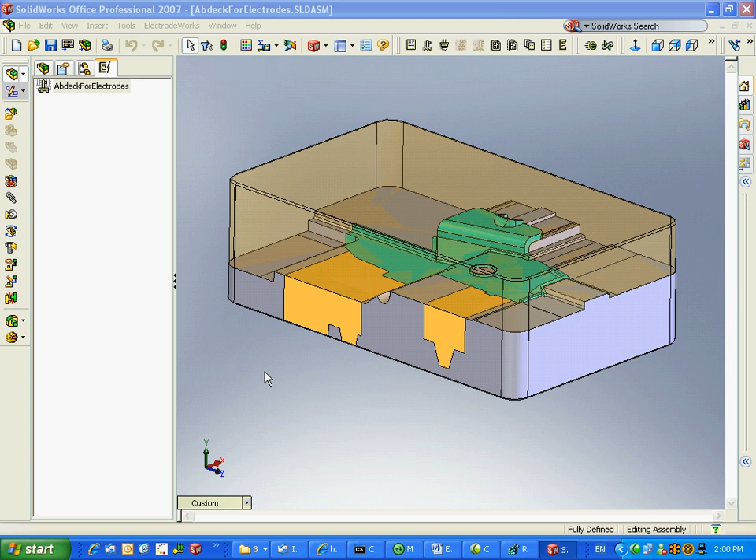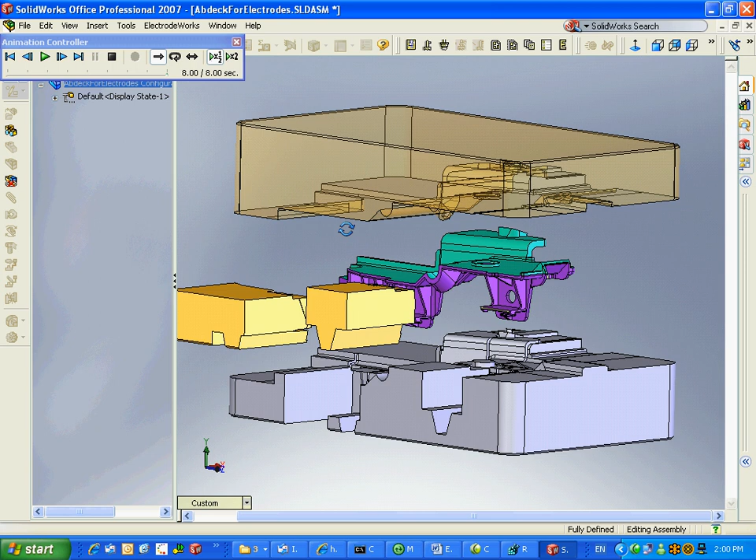This is the insert stack of Abdeck, a part from the car industry. We have split this part using SplitWorks. ElectrodeWorks runs in assembly mode and has its own feature manager tree from which all ElectrodeWorks menus can be activated, as well as from the traditional menu and icon system.

The first step when adding an electrode is to retrieve a holder from the standard or user-created library. Next, we identify the part and the electrode direction. Now we select the burn faces and automatically calculate the electrode according to the bounding box around the faces.

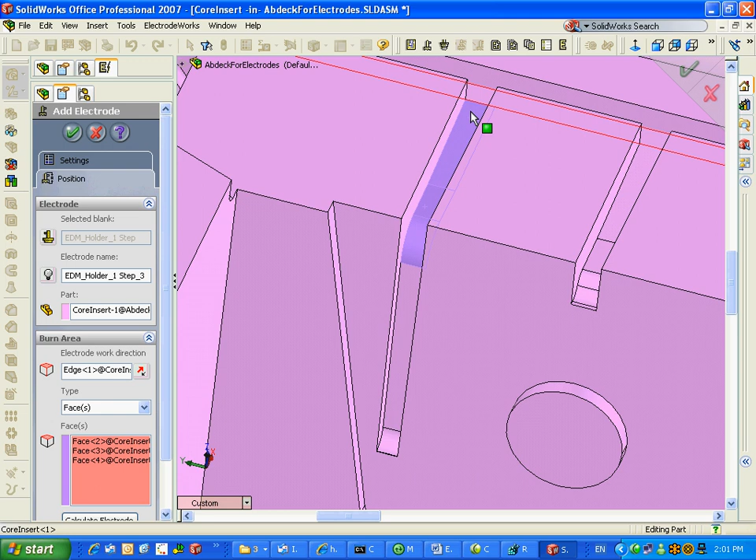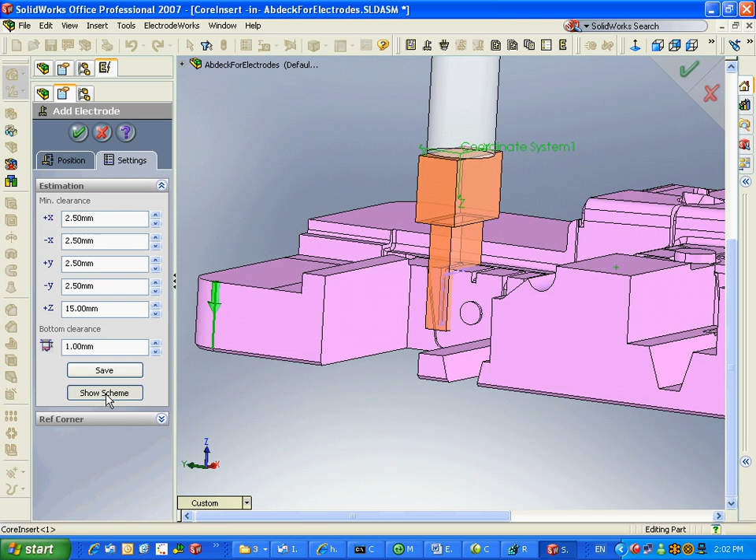Under the settings menu, we can see the modifiable parameters of the bounding box, and an option to add fillets or chamfers to the electrode itself.

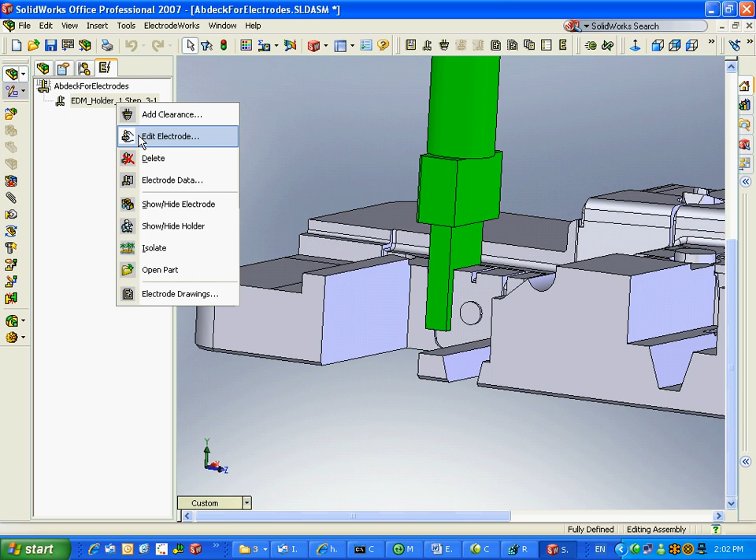After validation, the electrode is created and appears in the ElectrodeWorks feature manager tree. Isolate, copied from standard SolidWorks, is a useful tool in this context.

Now we are going to add clearances to the electrode. We choose a direction and the faces to clear.

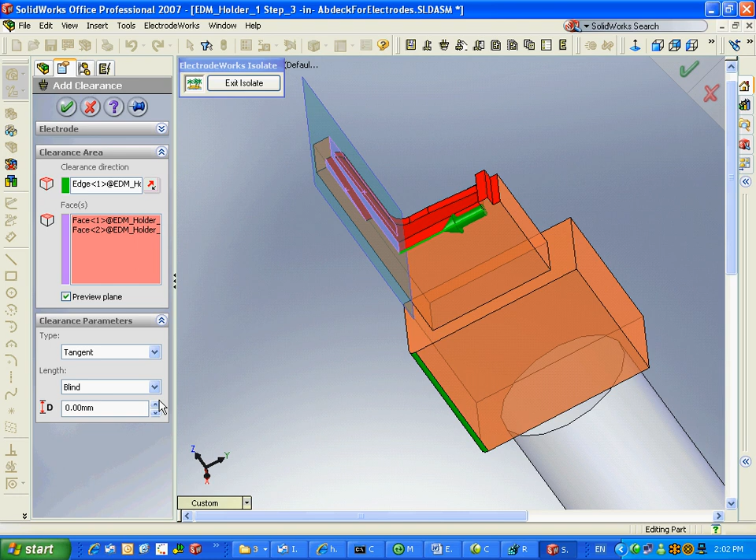In this case, we select the through option to delete all these faces. Next, we delete the faces on the opposite side.

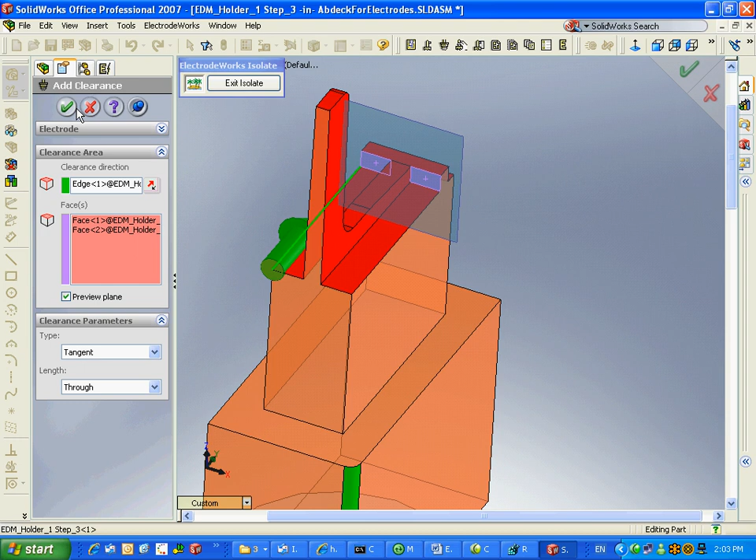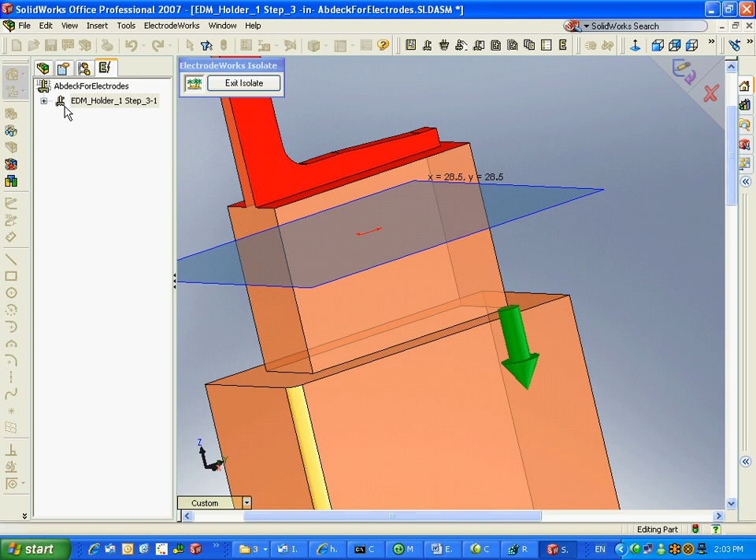And finally, we make a clearance for the non-burn faces of the core. This clearance is created 5 millimeters distance. Exiting the isolate, we see the result, including the clearances.

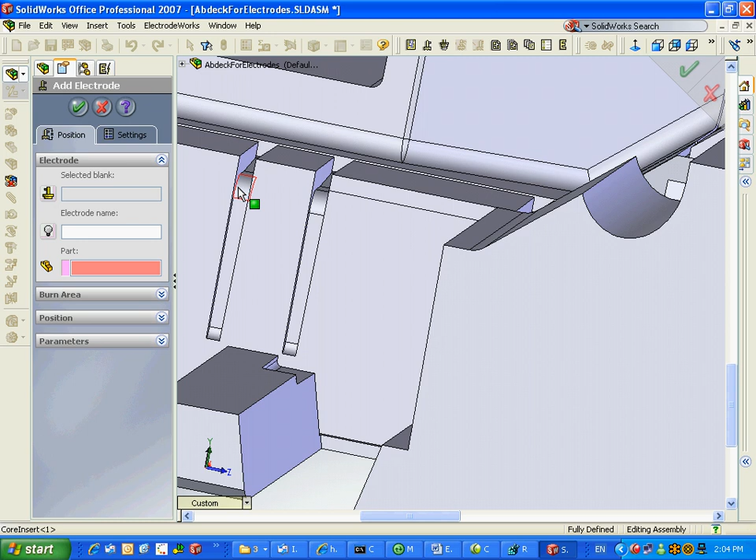Next, we create an electrode for 2 ribs together in the same manner. Again, we select an electrode holder.

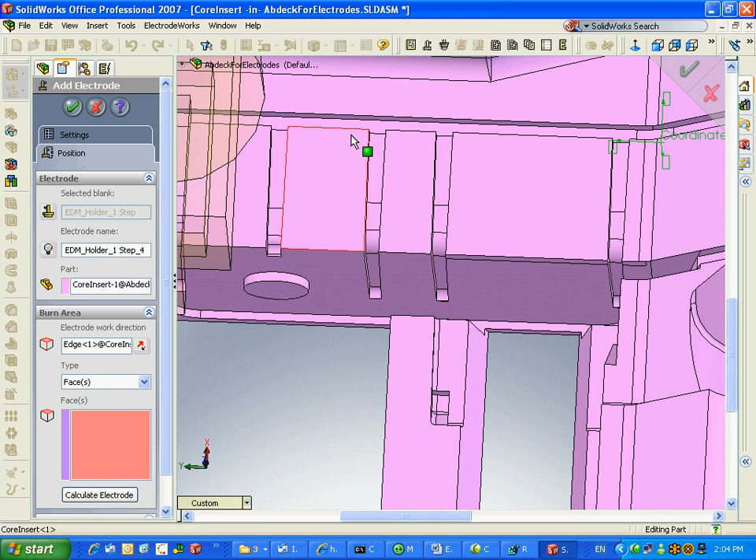This time, we box select the faces that we are interested in burning, and deselect the face we don't need.

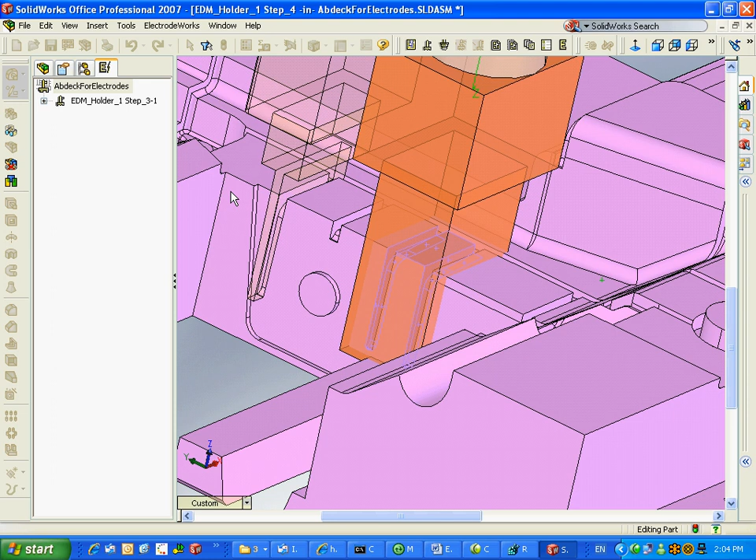Again, we clear the faces on both sides of the electrode.

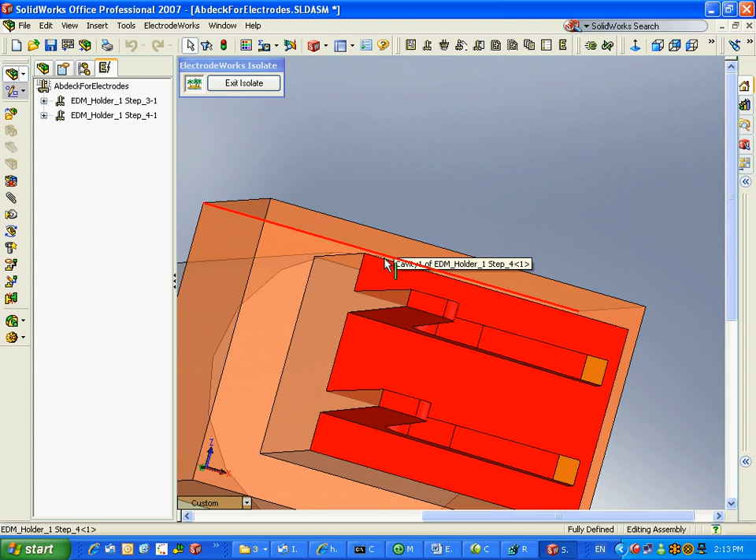Oh, there's a problem. We want to clear the bottom faces separately, but we have created the electrode a little bit too big. So let's edit it.

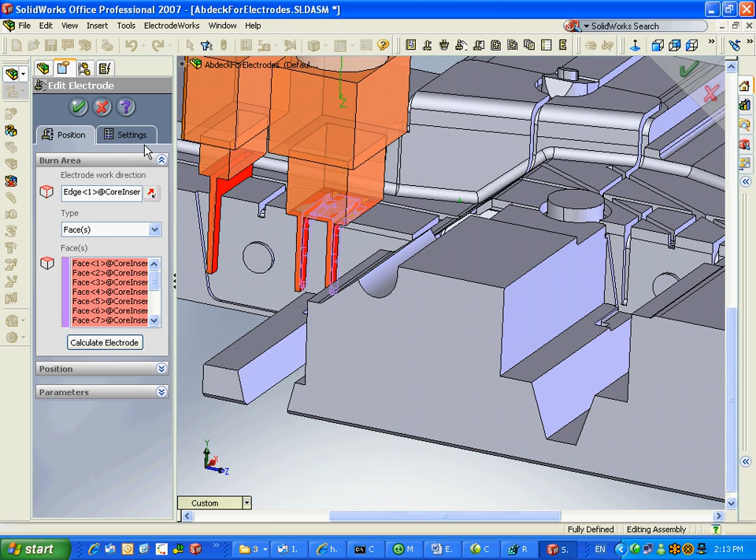Here we change the parameters of the electrode, and ElectrodeWorks dynamically updates the preview.

Well, that's not what we want. We want to clear the ridge. So we'll change the other B2 or B1 parameter.

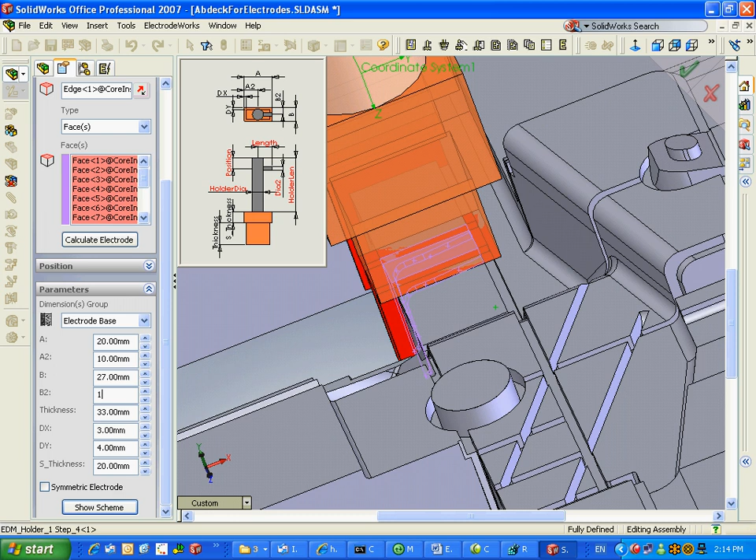Okay, that looks right. On validating, the electrode is modified, including the already created clearances.

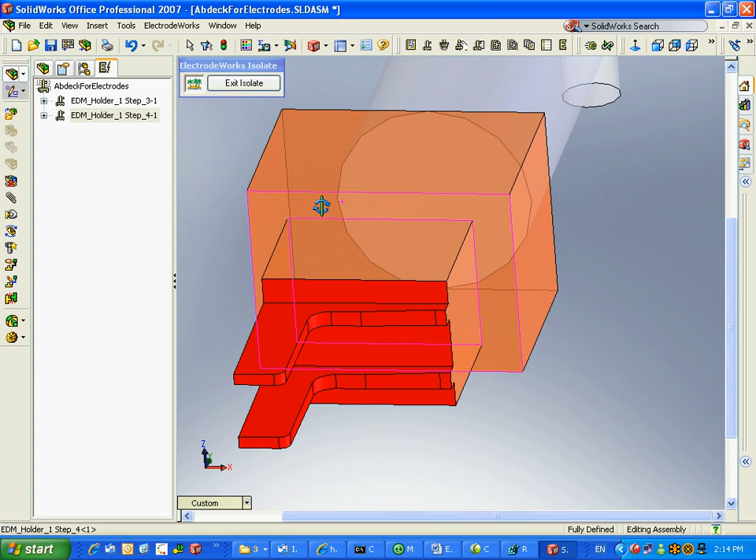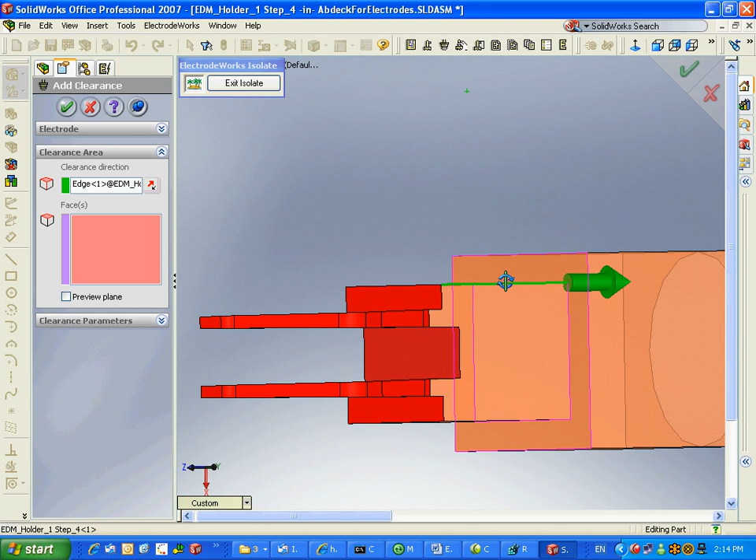Now we can clear the bottom faces separately. Here we use the blind option for the middle face, 2 millimeters, and the side face of 5.

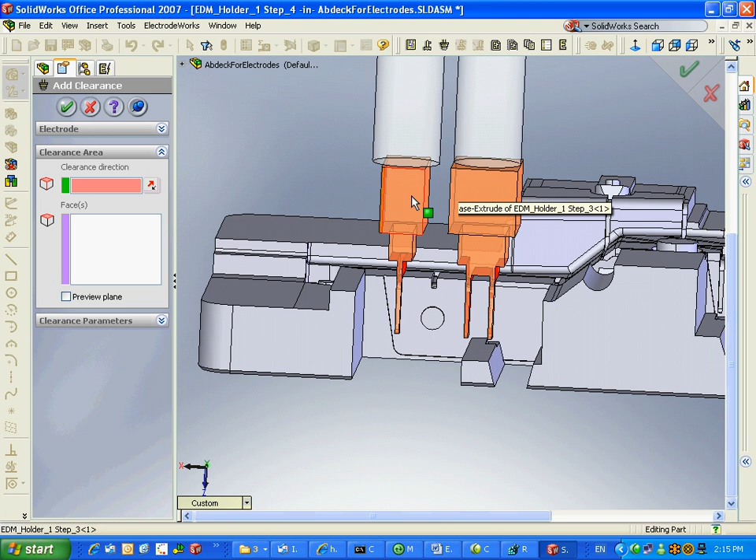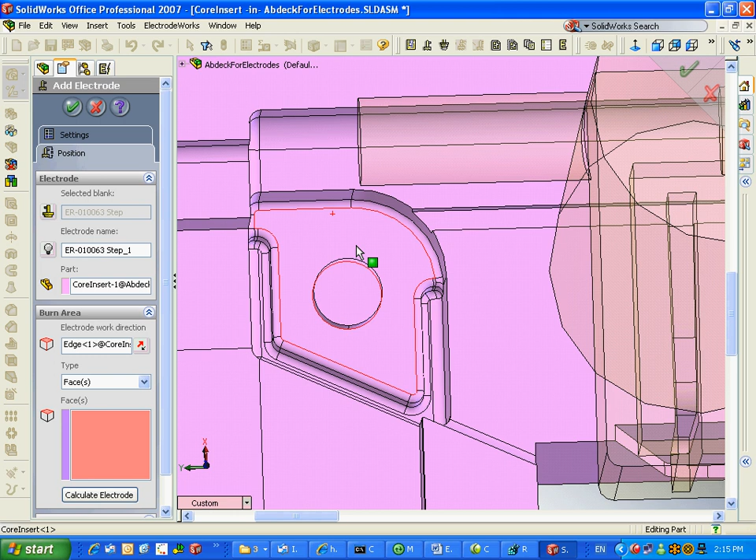Let's create one more electrode. This time from the Erowa library. Again, we box select the faces and click on the Create Electrode.

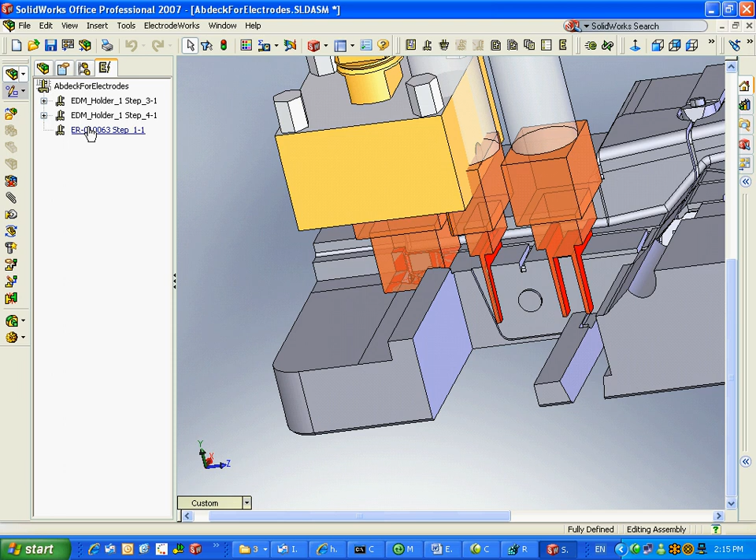And the electrode appears in the ElectrodeWorks Manager. Again, we isolate and request to make clearances.

The clearances can be made either in a direct, which means normal to the face, or draft with an angle, as well as tangent directions, which is the default.

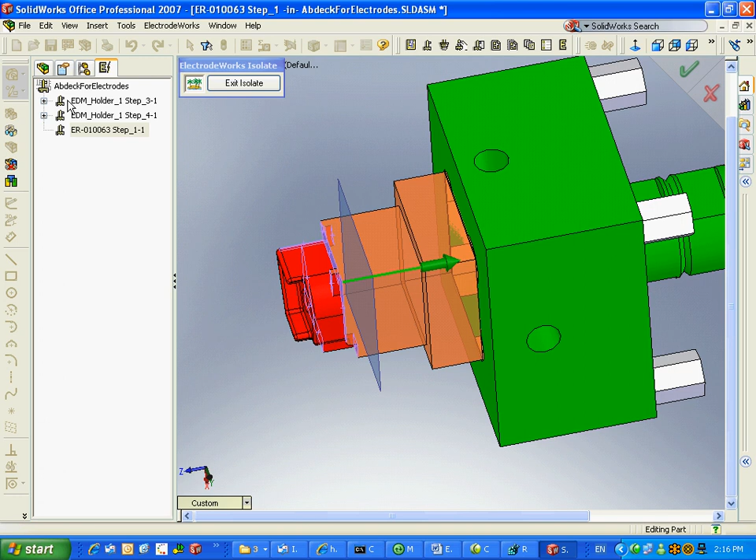Oh, ElectrodeWorks displays a message showing a problem with the clearance. We can either edit the clearance or just clear the problematic faces by adding another clearance.

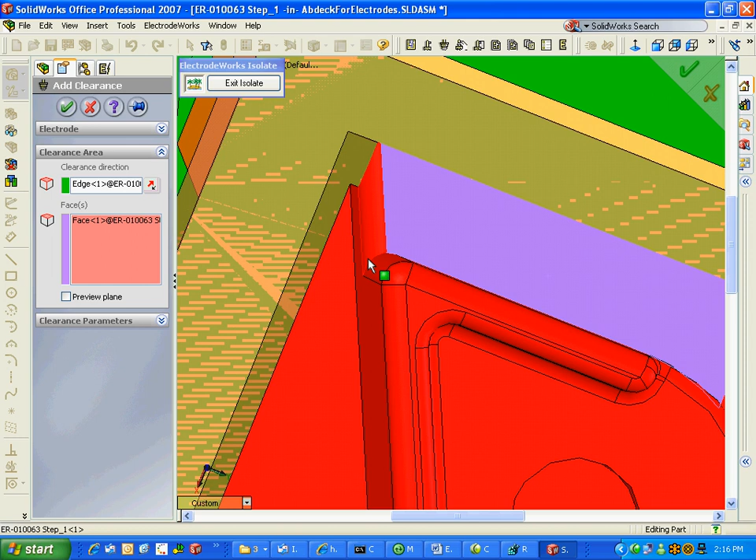This time, instead of a blind clearance, we'll clear until a vertex.

Next, we define project settings. Actually, this is usually done at the beginning of the project. Notice that the date, today's date, is automatically entered into the date box.

Now let's look at the project options, which define the default values for the ElectrodeWorks dialogues.

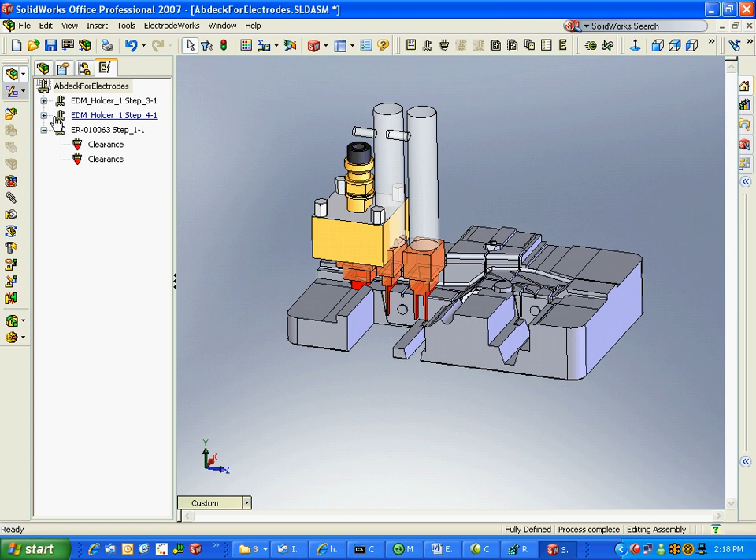Next, we add technology to the electrodes. In this case, we choose to add the technology just to one of them.

The technology data is added to the SolidWorks custom property of the part.

Next, we create a project report of all the electrodes. This is an Excel file with a worksheet for each electrode.

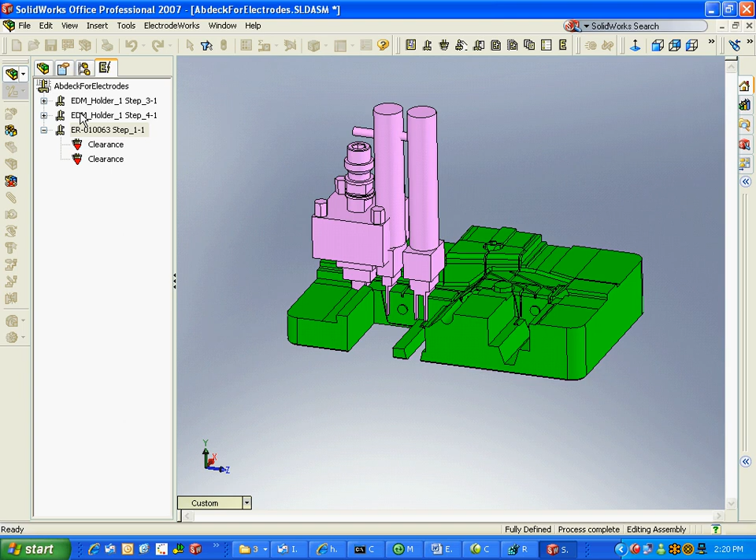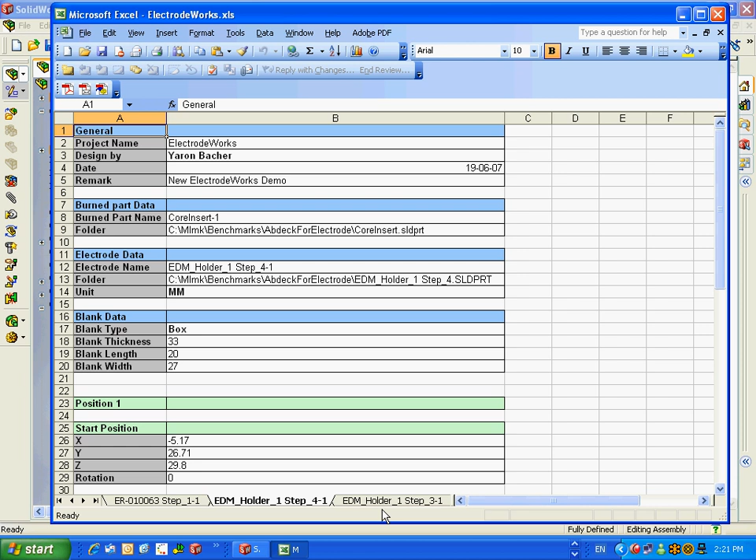Here we can see the information generated by the project report.

Finally, we create some drawings. We can create EDM and manufacturing drawings per electrode or any group automatically. The EDM drawings can be separate or one drawing for all electrodes on a specific part.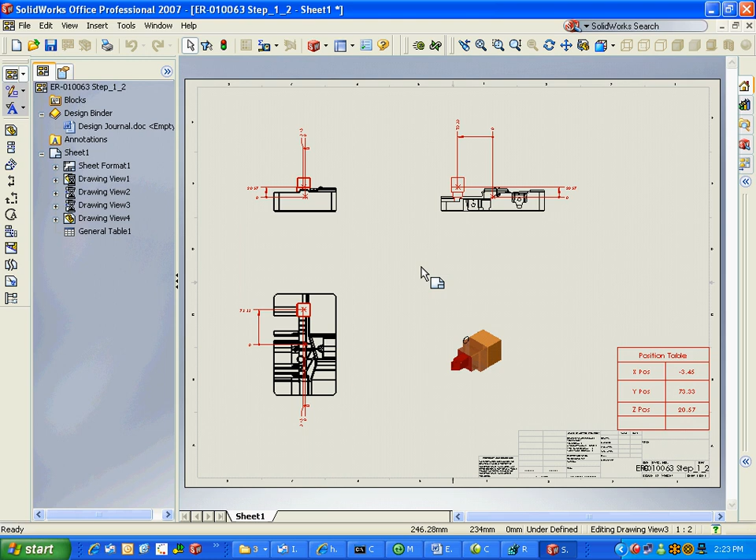You can see the positioning dimensions and table on the EDM drawing. And here is the manufacturing drawing with the manufacturing dimensions.

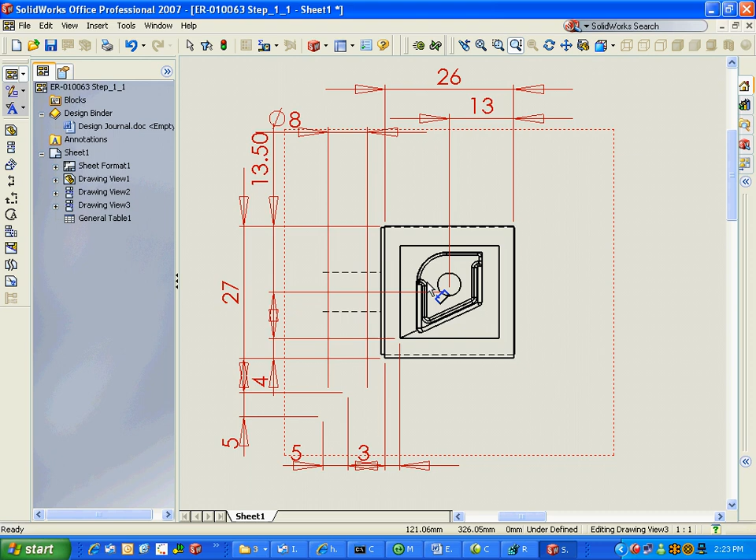You can actually create all these drawings on all electrodes for a specific part with just one click of the button.

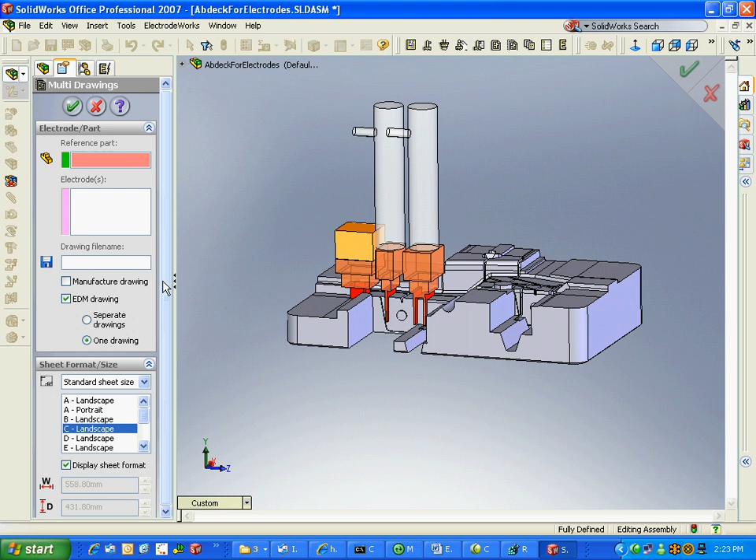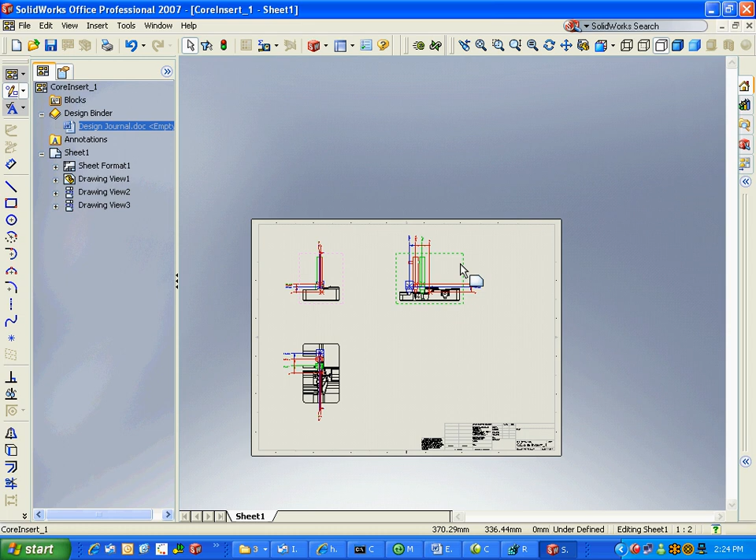Here we create a single EDM drawing for positioning of all electrodes, each one with its own color.